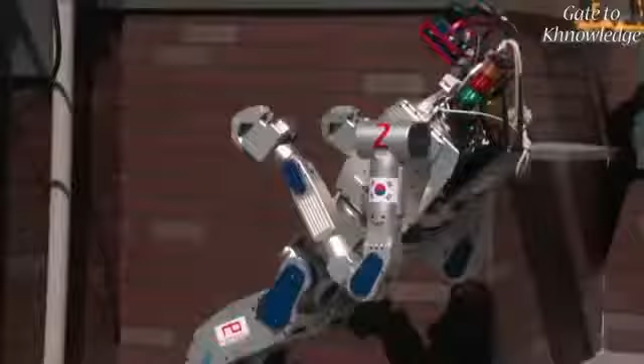It's one of the most ambitious challenges in the history of technology. Ladies and gentlemen, start your robots. The race to build robots that can save lives in a disaster, that can even rescue us. But to do that, they'll need to climb ladders, walk over rubble, turn valves.

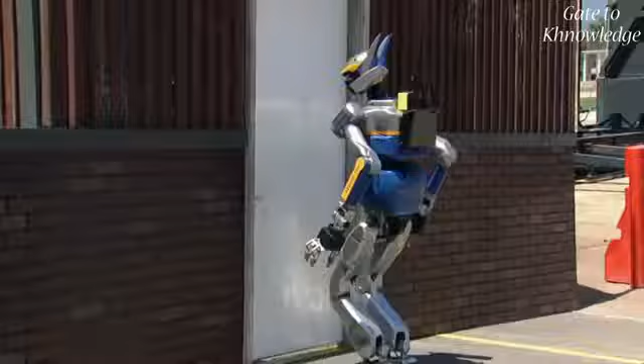And no one knows if it's even possible. There's so many things that could go wrong. It's scary. When you try to instill human-like intelligence, human-like manipulation skills into machines, it's just very, very hard to do. What will it take for robots to have the right stuff?

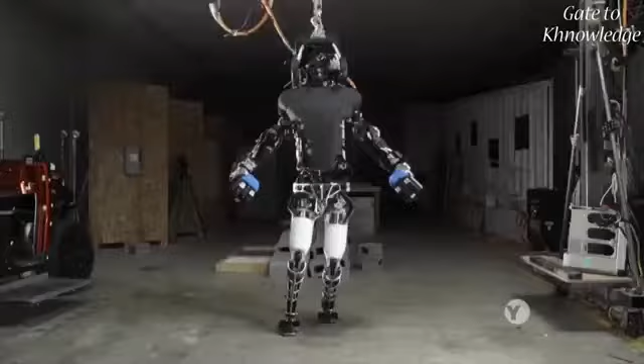And are we ready for the consequences? It's too easy to look at them and say, oh, they're not there yet. They will get to something very powerful. And then you have to say, well, where will we have gotten to? They might actually have the capacity to be smarter than us.

What impact will robots have on our future? On how we work, how we interact, even how we see ourselves.

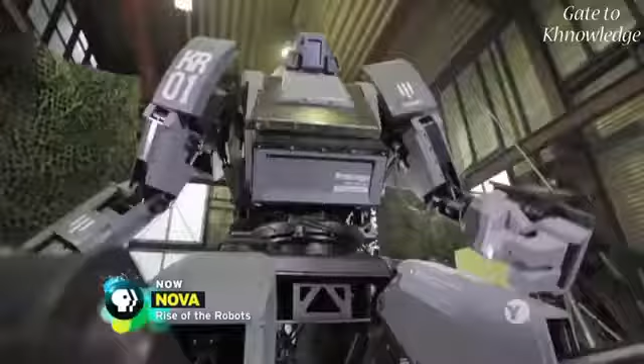Some look so human, it's hard to tell us apart. But looks can be deceiving. People see these humanoid robots developed in Japan and all these fancy things, and they had the expectation that, oh, we have these robots and they're gonna save the world. But that didn't happen.

March 2011. A devastating earthquake and tsunami rocked Japan. Explosions and fires at the Fukushima Daiichi nuclear power plant left the area dangerously radioactive. Going inside, even for a few minutes, was life-threatening.

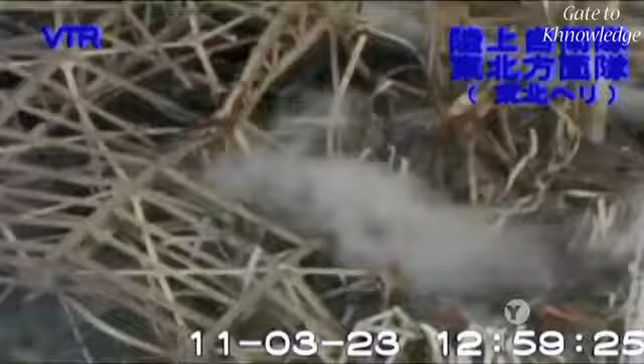It was the perfect time for Japan's cutting-edge robots to come to the rescue. But none did. The real tragedy was if simply some valves could have been turned, or some switches could have been flicked, or hoses attached, a lot of the meltdown could have been prevented.

The question was, when robots were needed the most, just how come they weren't effective? And so I think that led to a lot of reflection. After decades of research, where were our robot heroes?

For generations, science fiction has portrayed robots as our loyal servants. Welcome to Altair 4, gentlemen. I am to transport you to the residence.

But it turns out, our imagination has taken us much further than our technology. It's hard to create robots that can function in our world. One of the challenges with deploying robots in the real world is that the real world is like the wild, wild west. It's very rich and complex and very unforgiving.

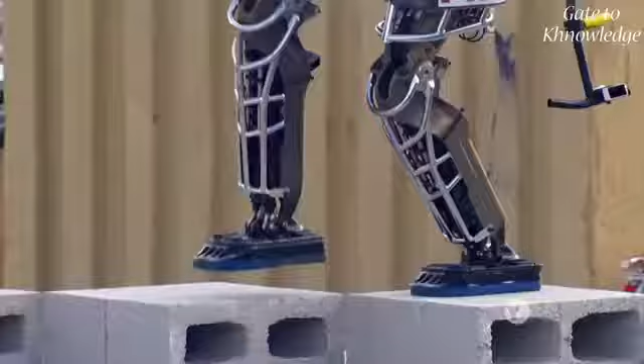What will it take for robots to make their way out of the lab and into the real world? We're about to find out. Ladies and gentlemen, start your robots. At the most ambitious robotics competition in history.

We welcome you to the DARPA Robotics Challenge. This is where imagination meets innovation. You have completed the course! In 2013, at a racetrack on the outskirts of Miami, DARPA, the research arm of the U.S. Department of Defense,

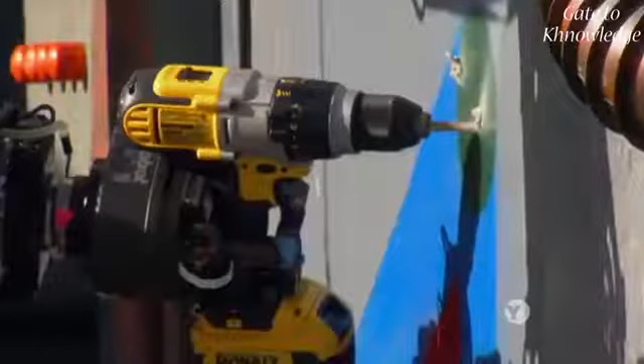challenged 16 teams from around the world to build rescue robots that can help save lives in a disaster. Very exciting, very exhausted, very nervous, and frustrated at the same time. Dealing with robots is always like that.

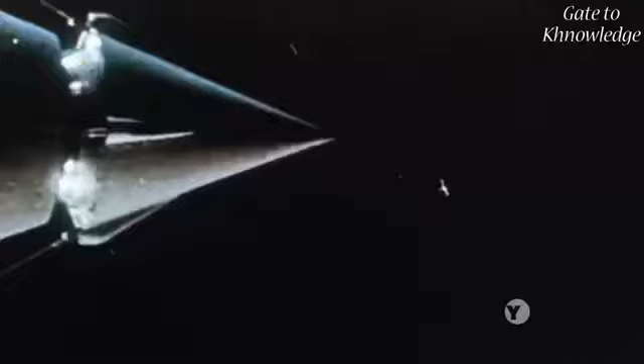It's the kind of challenge DARPA is known for. Cutting edge and high risk. DARPA was formed back in the 1950s in response to the launch of Sputnik, the world's first artificial satellite built by the Soviet Union.

Since then, the agency has spent billions developing military technology, advanced weaponry, like stealth technology, drones, and night vision. But the spin-offs from this research have gone far beyond the military. The internet, GPS, bionic arms, even Siri were all fueled with DARPA funding.

Cancel golf today. It's off your calendar. Good.

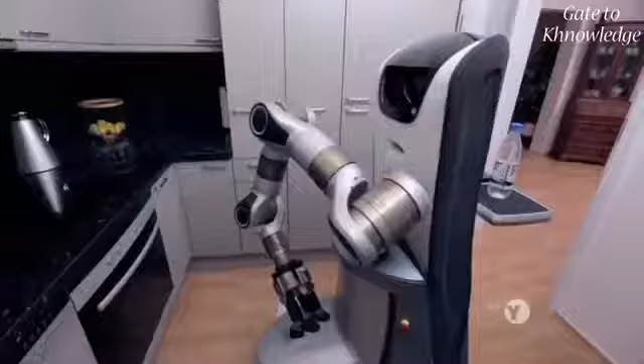If these researchers succeed in creating rescue robots, the same technology could be used to develop robots that take care of the elderly, babysit our kids, clean up after us. Robots in almost every facet of life.

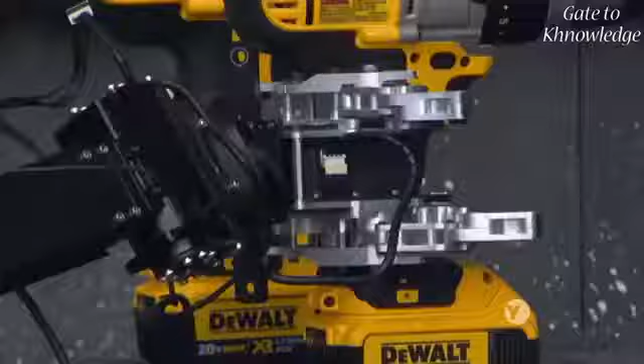But first, can robots really help out in a disaster? To find out, DARPA has set up an obstacle course for bots, with human operators controlling their every move. Yeah, here we go. The robots must perform basic tasks like opening a door. All right, go, go, go.

Turning a valve. Drilling a hole in a wall. Walking over rubble. Even driving a car. Bot after bot takes their first steps into the real world.

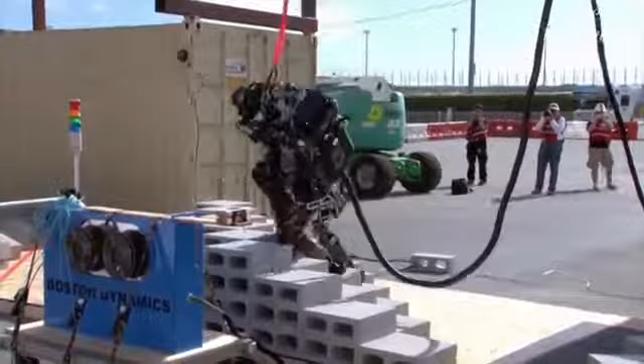And there's nothing easy about it. It's a monumental challenge. DARPA calls it DARPA hard. I almost said it was DARPA impossible.

Robots fall off ladders. Some barely move an inch. They even struggle to open doors. The things that a human can do instinctively, easily—you don't realize how hard something like walking is until you try to reproduce it in a machine.

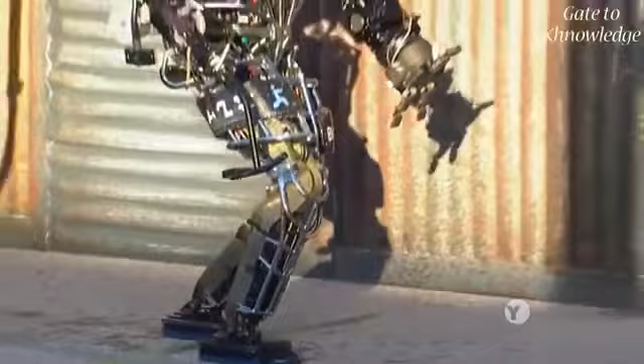When my baby daughter took her first step, did she walk? No, she took a step and she fell down, right? Over time, she started to walk, right? And it's kind of like we're seeing here. There are a lot of baby steps.

After 2 days of competition, the results are not impressive. But this is just the start of DARPA's grand experiment. The agency is giving the roboticists another chance to get it right, and they're putting their money where their mouth is. The top scoring teams in this first challenge are receiving $1 million each to continue their work.

In 18 months, they'll return for the final challenge and the chance to win a grand prize of $2 million.

It's not clear to me how well the teams are going to do. They can't be too hard, because then everybody fails. Can't be too easy, because then it's not worth doing at all. But if you make it just right, like Goldilocks, right? I have tried to hit the sweet spot of difficulty, but I think risking failure is the DARPA way.

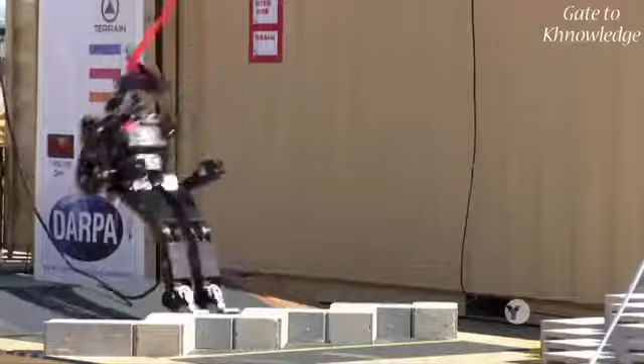Will the challenge push the technology a giant step forward? Will robots ever make their way through our world the way we do? No.

Back in the early 50s, Alan Turing, one of the founders of artificial intelligence, said that the best thing we could do was build a robot with TV cameras for its eyes and motors to drive its legs and have it romp around the countryside and learn from the real world. But he decided that was technologically too hard back in the 50s, which it certainly was. So he said, let's leave that physical interaction to later, and let's work on more abstract problems, the intelligence abstract problems.

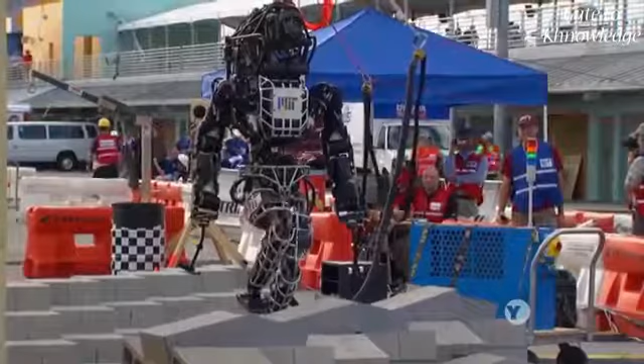The field of artificial intelligence, or AI, has already built machines that beat us at chess, trade stocks with lightning speed, and search for anything we want in an instant. Yet, when it comes to robotics, progress has been painfully slow. Some of the biggest problems robots face are things we humans usually take for granted, like mobility, manual dexterity, and the ability to see and understand our environment.

These are the challenges the robotics teams will tackle in the DARPA competition, beginning with mobility. What's the best way to make a machine that can move through our world? Does it need to walk on 2 feet like us?

Some roboticists think the answer is yes. The shape of the robot is dictated by what it needs to do. There's a reason why the step size in your home is this big. There's a reason why your door handle is this high, because it's designed for humans to move around. So unless the robot is the shape and size of a human, it won't be able to navigate and move around in the environment designed for humans.

But getting around on 2 feet isn't easy, even for us. It takes your average infant almost a year to go from crawling, to toddling, to walking. What does it take to give a robot this intrinsic human ability? It's one of the biggest problems facing roboticists today.

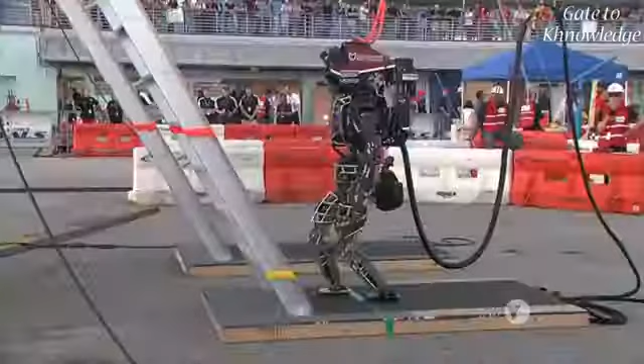In Pensacola, Florida, at the Institute for Human-Machine Cognition, or IHMC, one of the teams competing in the DARPA Robotics Challenge is hard at work developing its own software to run this massive bot named Atlas, a 385-pound powerhouse. DARPA funded the design and development of this rescue robot. Several teams competing in the challenge are using this hardware, but writing unique software to guide their robot.

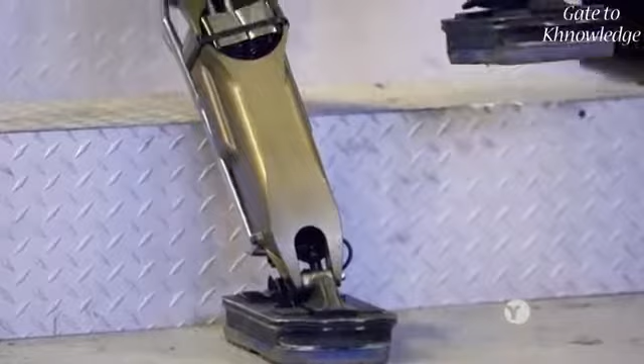You might wonder why Atlas is so top-heavy. Most of its oversized head is packed with cameras and sensors, and while its feet may look small, they're designed to fit in the kind of places we walk. With bipedal walking robots, there's still a lot of strategies we have to determine, and there's no known textbook solution yet. It's more art than science still.

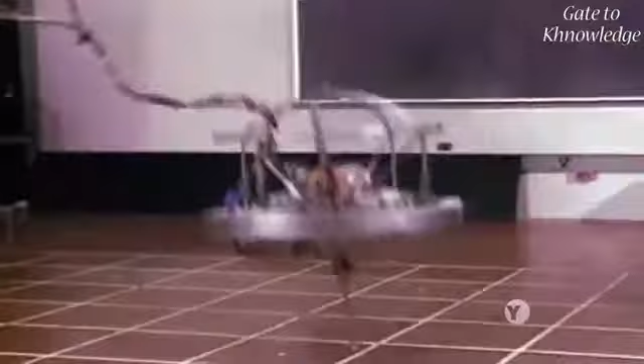For team leader Jerry Pratt, finding the best way for a bipedal robot to walk has not been easy or quick. Well, I've been working on bipedal walking robots since 1994, so 21 years now. He started back in graduate school at the MIT Leg Lab, where some of the most bizarre-looking bots hopped, jumped, and flipped. But the robots Jerry built were different, because they walked on 2 feet.

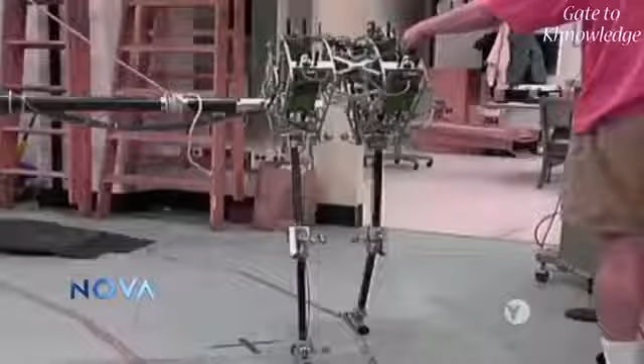Using nature as his guide, Jerry gave his bipeds hips, knees, and ankles that mimicked how animals move. This one, called Spring Flamingo, had specially designed motors that worked a lot like muscles, varying the amount of power each joint used. Its legs and feet worked a bit like shock absorbers. They had a little give.

That robot was a really good workhorse. We've had it working for about 3 years, probably walked about 20 miles or so.

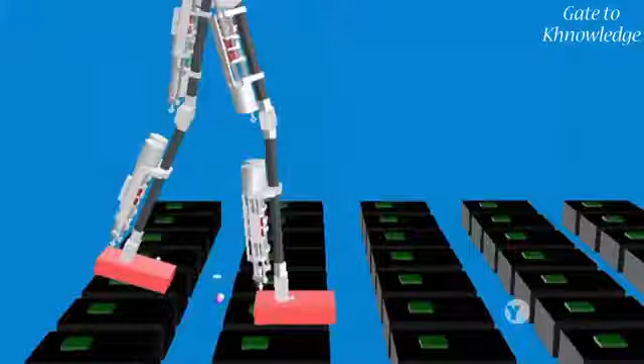When it came to designing a humanoid, he focused on developing the perfect combination of hardware and software that would enable his biped to stay upright as it calculates the best way to shift its center of mass, lift its leg, swing it forward, and put its foot back down in the right place, and with just the right amount of pressure. To make these elaborate calculations, the robot needs instructions, lines of code that tell it how to move.

These lines of code are written in a programming language that resembles English. But for Atlas to use them, its onboard computer has a program that translates them into a language a machine can understand: zeros and ones. It takes more than 2 million lines of code to run Atlas.

500,000 just to put one foot in front of the other. It's the interplay of hardware and software that keeps this bot on its feet, an ability that took hundreds of thousands of years of human evolution to perfect.

We'll often look at what strategies does a human use in order to walk, because the physics in the world that a human operates in is the same as the robot. But we wouldn't be able to take a single step without having some pretty amazing senses.

When you walk, your eyes detect the position of your body relative to the world around it. At the very same time, a series of fluid-filled canals in the inner ear tells your brain the position and motion of your head, so you know which way is up.

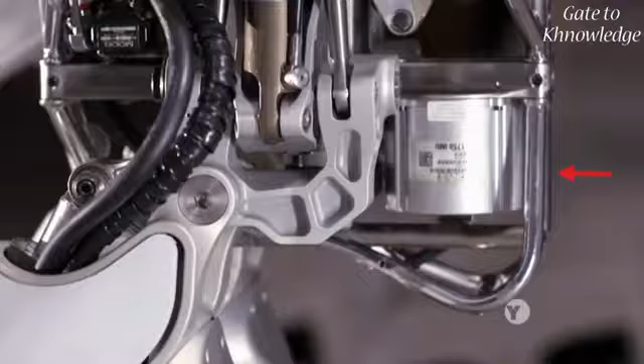Instead, it uses a small cylinder in its butt that contains gyros and accelerometers that tell it where it is and how it's moving. In addition, sensors on each joint tell Atlas where its limbs are in relation to each other.

The result is an extraordinary sense of balance, allowing Atlas to stand on 1 foot like a ballerina, at least in the lab.

But in the real world, Atlas's gyros and sensors aren't always enough. We only have a limited number of sensors on the robot, whereas with a human or an animal, you have thousands of little force sensors on every square inch of your body, over 100,000 just on the soles of your feet.

You can step on something and detect what it is, whereas the robots, they don't know that. They just know they stepped on something.

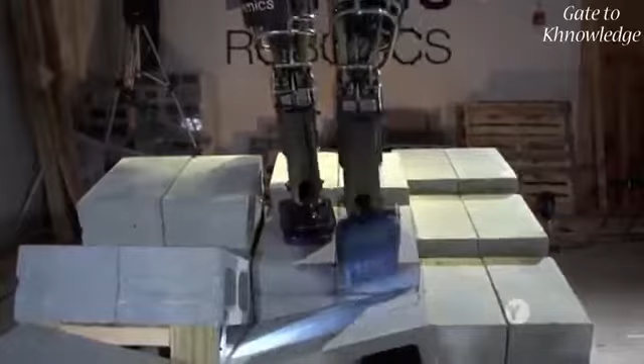At the final challenge, if Atlas should step on something the wrong way, if the hardware and software don't work perfectly, it will fall.

We cannot get up from a fall currently, and we probably won't survive a fall. If we fall during the finals, that may be the end of our whole weekend.

Atlas isn't the only biped that has trouble staying upright. Meet Hubo, designed and programmed by cousins Paul Oh and Jun-Ho Oh.

At the first challenge, Hubo clearly wasn't ready for the big, bad world. It's with fondness, it's also with some pain that we think about it. We went into the challenge with quite a lot of enthusiasm, but when we got there, really, it was just like one thing after another.

There were a lot of these real-world instances that we did not experience in the lab. That was a real awakening.

Across the ocean, at the Korea Advanced Institute of Science and Technology, Jun-Ho Oh is also doing some soul-searching. Our expectation was very high, but the result was very catastrophic. So the gap was too big.

It took at least a couple of months for the recovery. Then I got back to my normal mental stage.

After the shock wore off, the Koreans agreed to make a radical change in the design of their biped. My cousin has come up with this idea of adding wheels to Hubo's knees, as well as casters on its toes. And I call it the kneeling prayer mode.

Others like to call it wheeled mode or transformer bot mode.

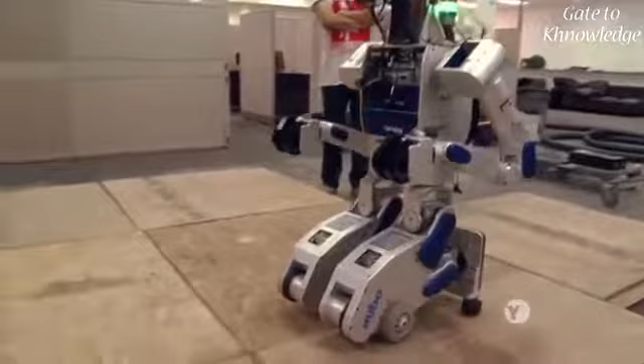Okay, so we are so happy. So we decided: short distance movement, just walk. And far distance, we move on wheels. It's much more stable.

Humans don't have wheels on the knees, but there's no reason why we can't add that to a robot. When the Koreans return for the final challenge, they'll debut their humanoid transformed with the help of some clever engineering.

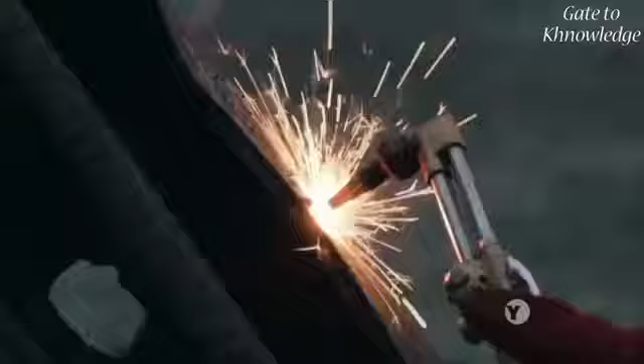But for a robot to help out in a disaster, getting there is just the first of many challenges. To assist rescue workers in the real world, it needs hands, with the kind of strength and dexterity it takes to lift heavy hoses, drill into walls, solder, and saw. It needs a pair of these.

Our experience of the human hand is that we can do everything with it. We can dig ourselves through rubble, we can make really nice paintings, we can knit. The human hand really distinguishes our species from all other species.

If you look at the way humans manipulate objects, we have this instinct for tactile sensing, for feeling the world. Understandably so, we've had over 200,000 years of human evolution to get to this particular point. Is it possible to translate a masterpiece of evolution into motors, cables, sensors, and thousands of lines of code?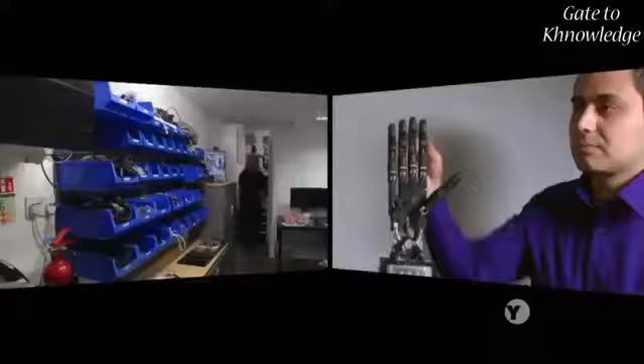On the outskirts of London, behind an unassuming storefront, a small group of robot enthusiasts are building a robotic hand that they hope could one day rival our own. When we first started building a hand, we actually bought anatomy books and tried to understand how the hand works. We thought it'd be good if we could copy, as best we can, the human hand.

The shadow hand was built with the idea of trying to get as close as possible to the human hand, but as engineers. Like the human hand, this robotic version has 4 fingers and a thumb. It's about the same size as the original, and can even shake like one. But that's where the similarities end.

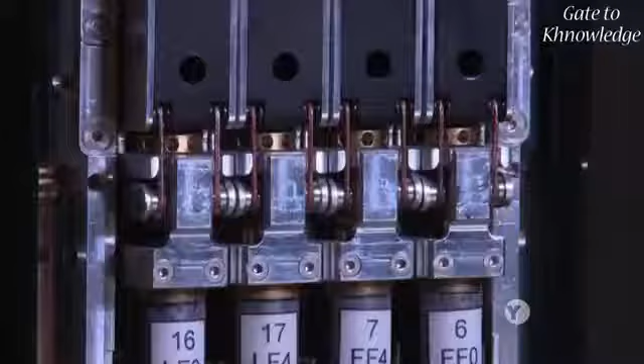We pack a huge amount of sensing and actuation. We have 25 joint position sensors, 9 analog to digital converters. We have 2 tendons coming from each joint to a motor in the forearm, 20 motors in the forearm. Each motor has a temperature sensor, a current sensor, and 2 force sensors, so we can tell how hard the motor is working and how hard it's driving the tendons. We put contact sensing in the fingertips so we can tell that we've touched something. So there's a wealth of computing power just to get something that has the same set of movements as your hand.

And with this level of dexterity, it can do a lot more than card tricks. We had this hand handling pipettes and lab equipment, removing the human from the risk - for example, people that work with very, very nasty bacteria and viruses.

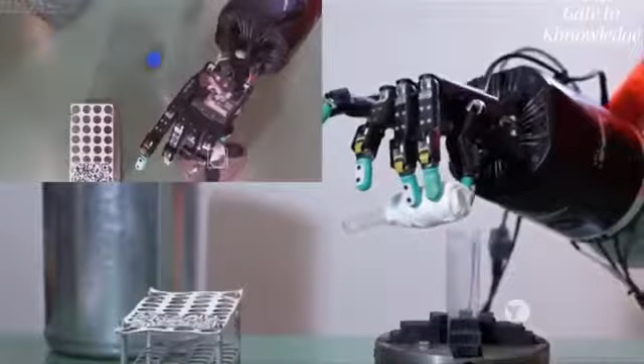The shadow hand was designed for delicate tasks, not for dirty jobs like this. When you look at where robot hands get used, you find people who want to do something delicate and precise, and people who want something big and rugged and solid. For the robots in the DARPA challenge, strength and precision are a must.

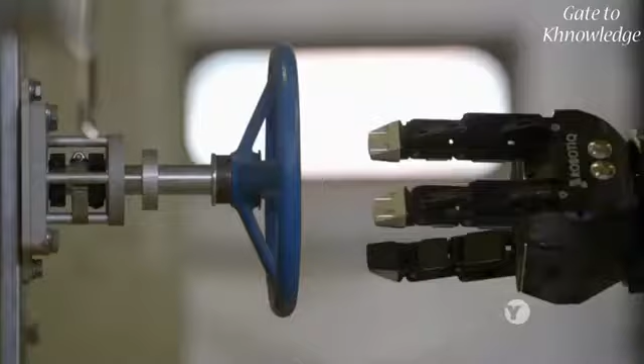Finding the balance between them has been a struggle for team leader Brett Kennedy, who developed this 4-legged rescue robot named RoboSimian here at NASA's Jet Propulsion Laboratory.

My first intuition is that this needed to be a very robust hand, and I'm thinking, well, robust means big. Why don't you go find out how big Wilt Chamberlain's hand is and make a hand that big? So, if anybody's curious, Wilt Chamberlain's hand is very, very big. And not only is it very, very big, when you make a robotic version of it, it actually cannot deal with normal human scale tools.

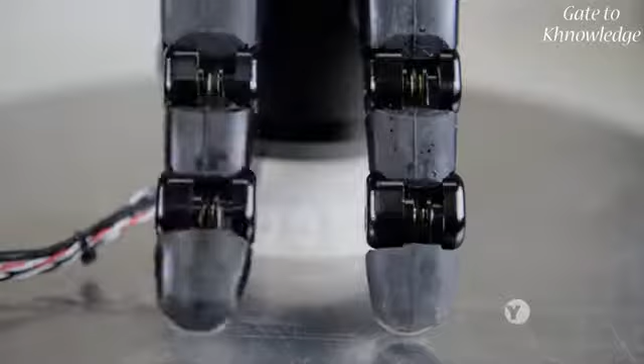So they modify their design, making a smaller hand with just 3 fingers. This does everything we needed it to in the competition. It grabbed everything, the human tools, so we thought we were in pretty good shape. But then, at the first challenge, RoboSimian had to open a door, and things got messy.

So here's an individual finger, and in that individual finger there is an artificial tendon, a synthetic fiber. When excessive forces happen, it snaps.

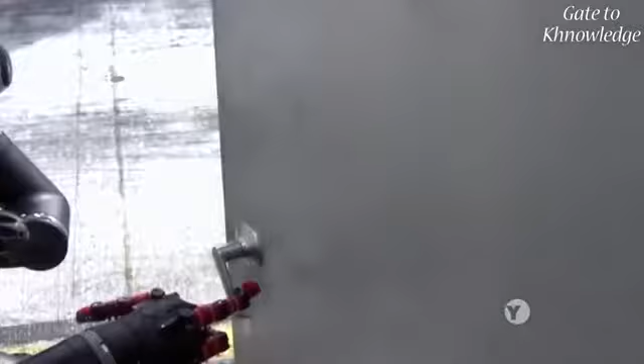When Kennedy realized RoboSimian's fingers couldn't provide the strength he was looking for, he came up with a radically different idea. So this is the cam hand. To do most of the work that we need to, a simple hook works just fine so that we can actually get a grasp and we can hold on to most everything we have to.

Fact of the matter is this is a very simple, dumb system. It closes until it encounters something, and then that will hold it, and hold it securely.

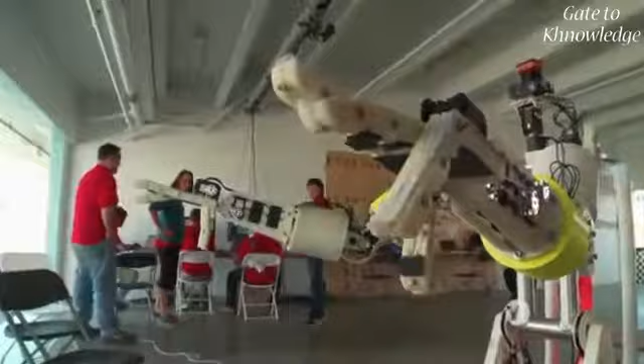In their quest to grasp victory, the teams competing in the DARPA Challenge will rely on all kinds of hands.

Many are using this gripper, designed with 3 fingers that can wrap around a variety of objects and even pick up something small. If we look at tasks like opening a door or using a drill, using hand tools and things, pretty much all these tasks you can perform using 3 fingers.

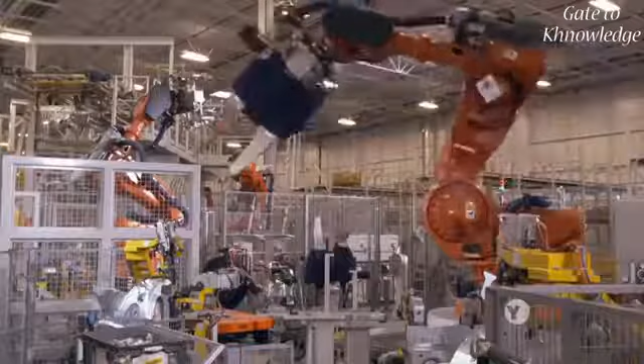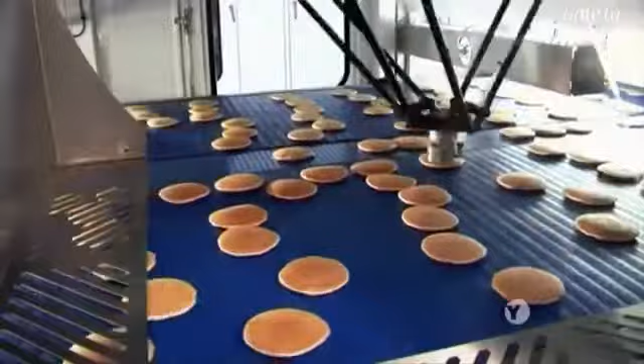Robotic grippers have already made their way onto the factory floor, attached to massive robotic arms that are as robust as they are precise. They build cars, lift heavy boxes, pack beer, sort through anything and everything from batteries to pancakes, doing the kind of jobs many people consider repetitive and downright boring.

But some experts fear as robots move beyond the factory into the real world, they'll take on a lot more. I think that we will lose at least 20 or 30% of our jobs over the next 20 years, and probably more.

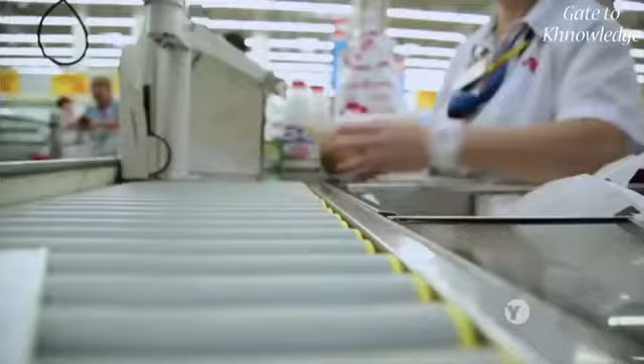Fast food workers are mostly going to be replaced. And the cashiers at Walmart, their jobs aren't going to last that much longer. The first to go are going to be drivers. Uber is spending a lot of money on driverless cars. Google is spending a lot of money. Now Toyota is. 40 years from now, there are not going to be a lot of jobs.

But not everyone agrees the future looks quite so grim. Over the past century, while robots and automation took over many manufacturing jobs, other kinds of jobs have increased. Some think that trend will continue. Machines in all of modern economic history have helped create jobs, not taken them away.

Machines are complements to workers, not substitutes. They come together and enhance the productivity of each. They need each other.

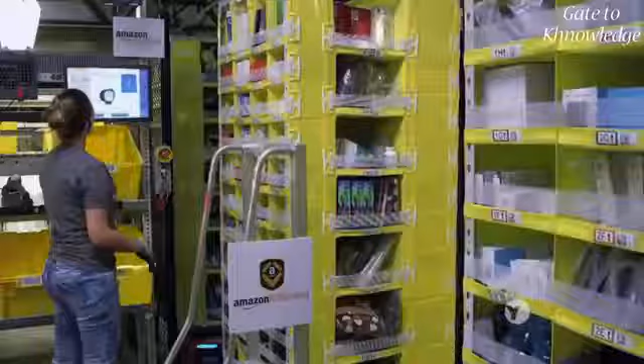Today, more and more jobs require humans to work side by side with robots, on the assembly line, programming them, and repairing them.

Technology creates new jobs. But only for those who have the skills to adapt.

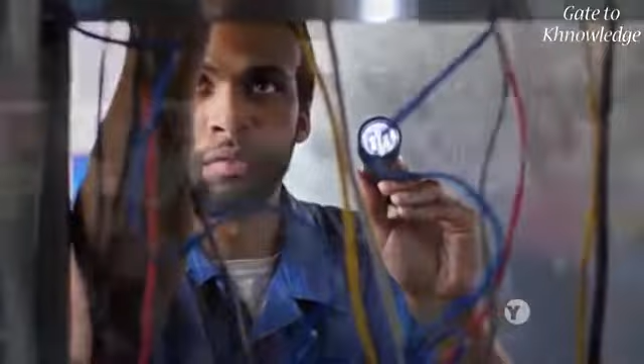What happens to the workers left behind? The worker who was displaced has to be compensated through retraining or through a pension. So that's a social problem, not a problem rooted in technology.

People should already be thinking about what kind of society we would want if not everybody can have jobs. Many ethicists say we should also be thinking about which jobs we want to hand over to machines.

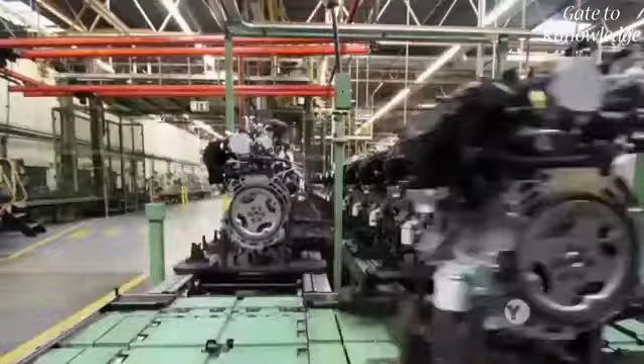Much of the things that we are creating can be used for a whole broad range of potential applications, ranging from elder care and child care robots to healthcare robotic platforms, even surrogate sex objects. What is acceptable? What impact these high-tech machines will have in the workplace and our homes remains unclear.

But one thing's for sure: robots are starting to take their first baby steps out of the lab and into the real world, learning how to manipulate objects we use every day.

But for a rescue robot to be truly useful, there's another hurdle researchers face, the toughest one of all: the challenge of giving a machine the ability to understand its environment, to give it a brain.

Our robot doesn't really have what you'd call a brain. He's not seeing the world, he's not perceiving the world. It's not thinking, it's not reasoning. You know, it's pretty dumb.

In fact, today's rescue robots are so dumb, DARPA permits human operators to guide them step by step. The bot waits for instructions that tell it what to do, those zeros and ones that computers understand.

The instructions travel through an elaborate pipeline that connects every piece of hardware, every motor and sensor, to a computer controlled by a team of human operators. The operators communicate with their robots via a wireless connection, just like they would at a real disaster. And at the final challenge...

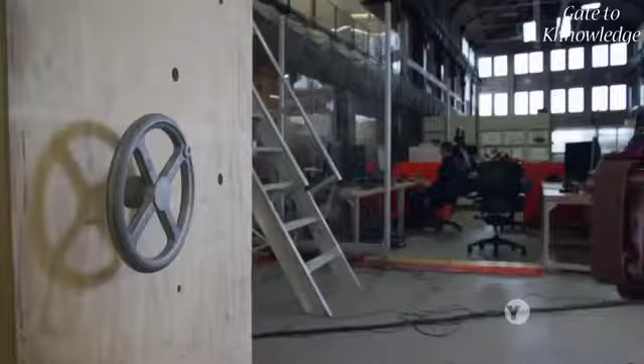These operators at Carnegie Mellon University are about to guide their rescue robot, named Chimp, through one of the skills it needs to master for the final DARPA challenge: turning a valve.

Using 6 different cameras located on the front and back of its head, and a spinning sensor called LiDAR, the bot sends data about its environment to the operators. A 3D image of Chimp's world appears on their monitors.

Chimp has no idea what it's looking at. So with the click of a mouse, the humans tell it exactly where the valve is. Things like recognizing objects, that's a very hard problem in robotics.

So we let the human tell the difference between a cat and a dog, a valve and a door. Turn the valve. Next, they show Chimp where to grab the valve, which way and how far to turn it. But it would be impossibly slow and impractical for the operators to tell Chimp how to move every joint, every sensor, every motor of its complex arm. This job must be done by the robot, all on its own.

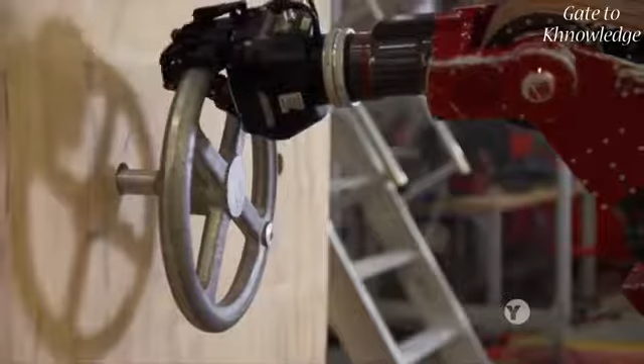As we move towards developing this technology further, we really want to push on the robot autonomy and let Chimp do more things on its own. But we always want to keep this as a tool for a human. In other words, keep the human in the loop and in control.

But that's not every team's goal.

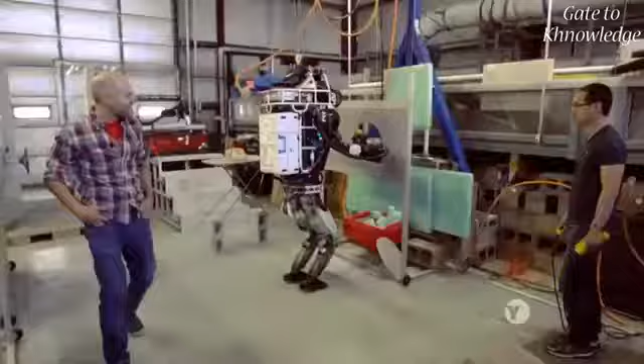At the Massachusetts Institute of Technology, Russ Tedrake is taking a different approach. He's determined to give his Atlas robot as much autonomy as he can, to make it a whole lot smarter. Our goal as researchers, especially in this artificial intelligence lab, we want to solve the long-term research questions about how to make autonomous robots. This is the closest we've ever come to building an artificial intelligence machine where this humanoid robot is moving through the world solving real problems.

At a disaster where you can't always count on a wireless connection, the smarter the bot gets, the more it can do on its own.

To create a more autonomous robot, Tedrake is developing software that helps it find and identify objects with a bit more independence. So if the robot is just looking at my kitchen at home, there's dishes everywhere, and you ask the robot to find a spoon, that's a really hard question. If the human just says, there's a spoon roughly over here, click, and he just has to look in a little patch of space for something that's roughly the same shape as a spoon. That takes an extremely hard problem of object recognition in a complicated environment and turns it into a very simple problem of, okay, I want to look for spoon-shaped things in this small region of space.

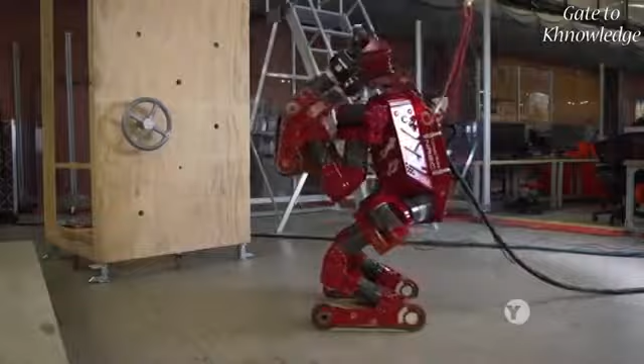While CHIMP needs its human operators to tell it exactly where a valve is and where to grab it, MIT's Atlas is programmed to recognize a valve on its own, figure out the steps it needs to take as it approaches, then grab and turn it with very little human help.

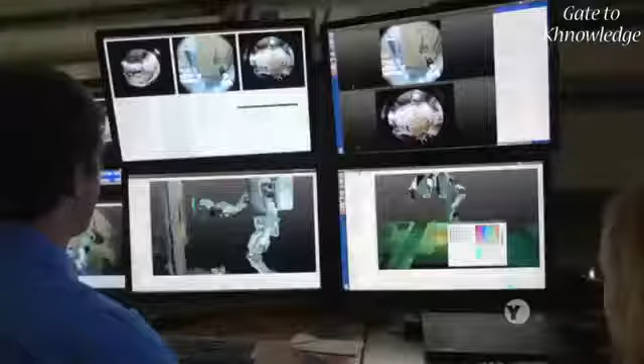We can put it in an autonomous mode and basically just watch the robot execute. It shows us what it's about to do. We could always stop it if it looked like it was going to do something wrong. But when things are going well, the robot's operating almost completely autonomously. So there's no real input coming from us to the robot at this point. It's just going on with its task.

A more self-sufficient robot could potentially help save more lives in a disaster. But just how independent do we want rescue robots to get? What if an autonomous robot enters a disaster and has to decide who lives and who dies?

It's the kind of moral dilemma that gave Will Smith nightmares in the movie I, Robot. You are in danger. When a bot chose to save his life over the life of an 11-year-old girl. Save the girl! I was the logical choice. Calculated that I had a 45% chance of survival. Sarah only had an 11% chance. 11% is more than enough. A human being would have known that.

While today's cutting-edge machines, like the thousands of drones used by the US military, still have a human in the loop, what happens in the future if they don't? There's conversations going on right now, conversations about what are the ethical laws of robots? How far should we really push this technology? How much autonomy do we want to give this new technology?

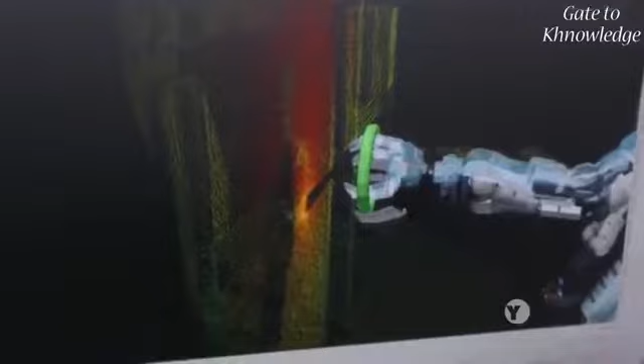There's so many things that could go wrong. The chance that the robot could break, or something that worked 99 out of 100 times, but we get unlucky. It's scary.

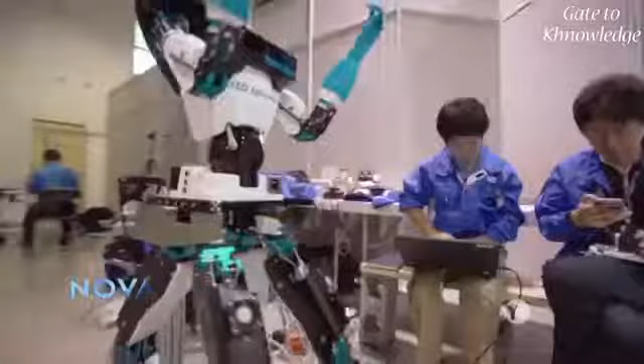June 5th, 2015. Our roboticists meet once again, this time at the Los Angeles County Fairgrounds. Over the next 2 days, they'll face off with finalists from around the world. Several teams come from Korea and Japan. This little robot comes from Germany. Most are funded through government or corporate sponsorship, but some bots, like this odd-looking one called Cogburn, are funded by the teams themselves.

We want to be first place in this competition. You too? Yeah, of course. It's a very stiff competition. Looks like there are a lot of good teams. Probably a lot that make it all the way through the course. So it comes down to top speed.

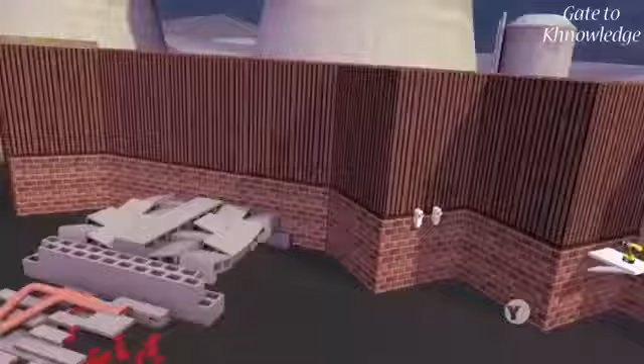To win, each robot must perform a series of tasks, a lot like the ones they faced in the first challenge: from driving a car, to drilling a hole in a wall, to walking over debris, to tackling a flight of stairs. The robot that completes the course in the shortest time wins. That puts a lot of pressure on the operators to keep their bots moving.

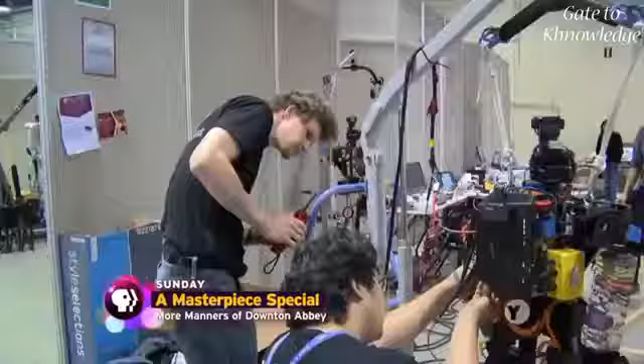And DARPA has thrown another wrench into the mix. Just like at a real disaster, the power of the wireless connection between the operators and their robots fluctuates. Sometimes the robots will receive a degraded signal, just bits and pieces of the data that tells them what to do. Other times, no data, no instructions at all. DARPA is hoping this will push the roboticists to develop more autonomous systems, bots that can finish a job without our help.

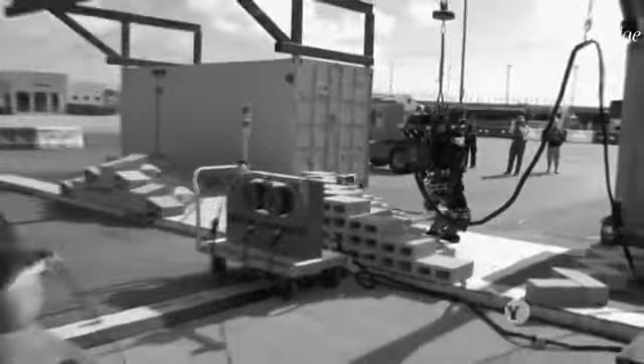But what makes the final challenge downright nerve-wracking is that unlike the first competition, where the bots were tethered, this time around there are no safety lines allowed, putting these multi-million-dollar machines in real jeopardy. What I was worried about is that almost none of the teams had tested their robots off the safety tether. We had no idea when these robots fell how badly they would break, so many of the teams were really scared.

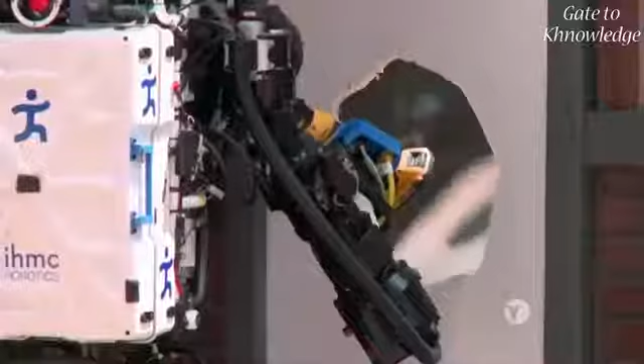Finally, the competition begins. Each robot has 2 chances to run the course. IHMC starts their first run. The robot drives without a hitch, walks up to the door with ease. All right, going through the door. All is looking good. Just 2 more tasks to go. Nice.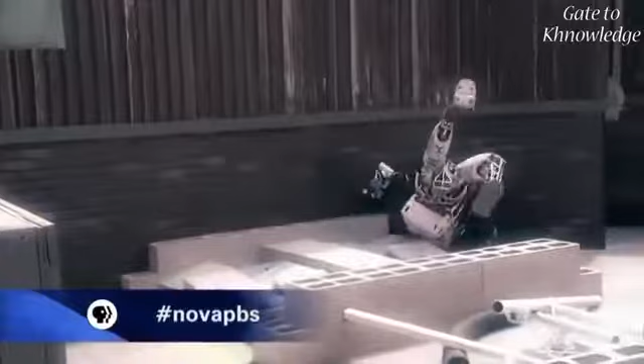It's Jerry's worst nightmare. After years of perfecting his walking software, a tiny misstep in the real world brought one of the most advanced robots on Earth to its knees. Nobody was really sure if the Atlas robot would survive a fall. We've never had Atlas fall before today.

The team worries the bot can't be repaired in time for its final run. For Carnegie Mellon's robot, Chimp, the day is also filled with ups and downs. When he fell down through the door, he's laying there and we're just, oh no.

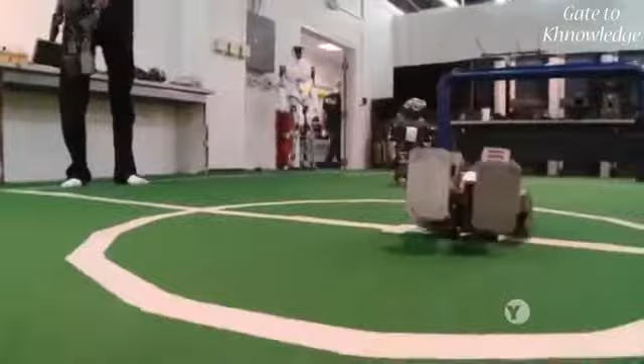Back in the garage, the operators scramble to find a way to get the red bot back up on its treads again. But the bigger a bot, the harder it falls. Smaller robots fall without breaking and have truly bizarre ways of getting back up again. But they're too small to do the kind of heavy lifting rescue robots need to do at a disaster.

Once you make it heavier and larger, you need stronger motors, and stronger motors mean heavier motors, and heavier motors increase the overall weight. Chimp weighs over 400 pounds. That's an awful lot of robot to lift.

The crowd begins to wonder if its run is done. I found it fascinating to watch the crowd watching the robots. This was really an emotional moment. They're collections of wires and gears and motors, and we were sympathizing with them at a very basic level.

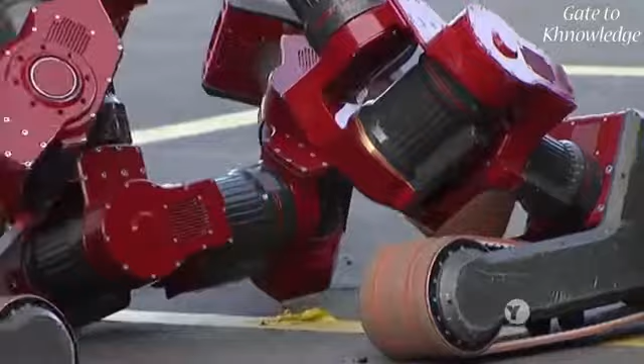Then Chimp's leg begins to move. And this little kid down in the front screams, 'He's getting up!' The bot not only gets up, it completes all 8 tasks, becoming the first robot to finish the course.

But not every team is so lucky. As MIT starts its run, hoping to show off its robot's autonomy, things run amok in the control room.

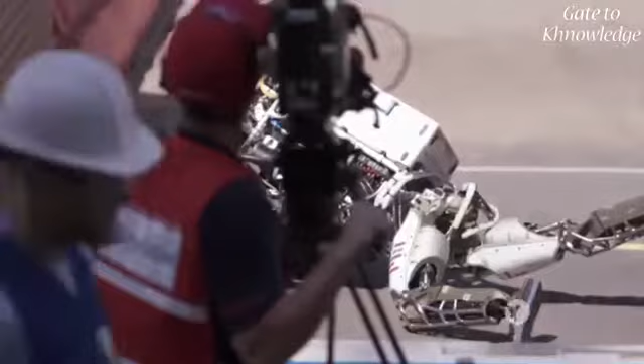We made a simple operator error when we went to get out of the car. We forgot to turn off the driving controller, so the foot tried to push the throttle when it was getting out of the car. In an effort to drive and get out of the car at the same time, the robot keels over and breaks its right arm.

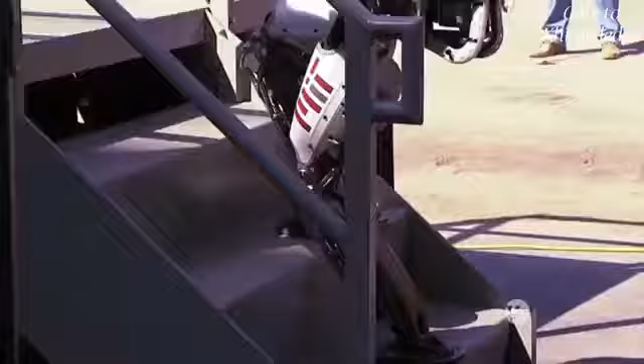But the operators were able to recover and do basically the entire course left-handed. The robot is still able to do most of the tasks, but it faces one insurmountable problem. The team has programmed it to use 2 hands to pick up the drill and turn it on. It can't do that when one of its hands is broken. Without completing all the tasks, Team MIT has no chance of winning.

A weary Team IHMC has worked through the night trying to fix its robot. Somehow the robot's still working, but the fall we took did something with the robot where he's kind of all messed up a little bit.

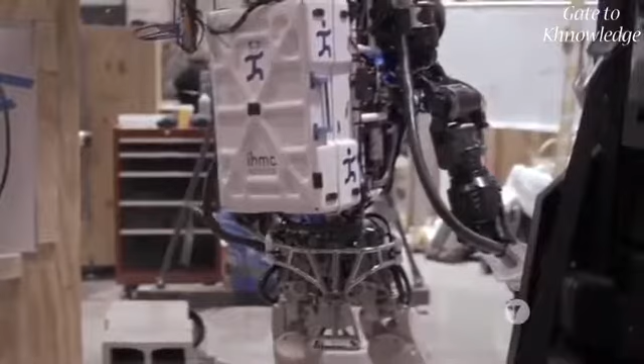There's something wrong with its LiDAR, the system that scans the robot's environment. The operator's going to have to adjust on the fly and compensate in his head for the errors in our sensors. Are we really leaning that much? Our strategy is still what it was yesterday, 8 points or bust.

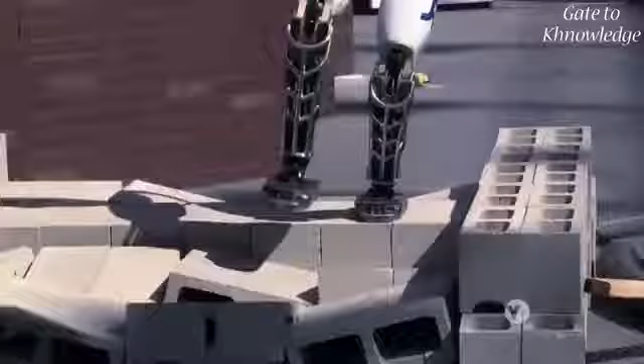The time has come for their final run. They make it through all the tasks and approach the dreaded debris, where they fell on their first run. All right, you gotta swing the right first. But this time they succeed.

The operator guides their robot all the way up the stairs, finishing the course in record time.

Having a human in the loop, you've got a supercomputer up here. Humans can adapt to just about anything. 8 points confirmed. The team is now in the running for first place.

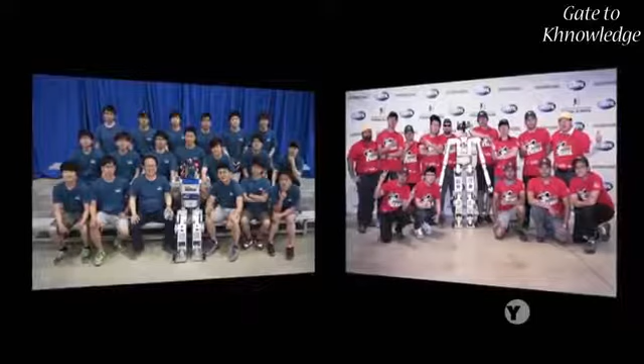But a one-of-a-kind bot could still give them a serious run for their money. Cousins Paul and Jun-Ho are each competing with their own robot, doubling the chances that one of their humanoids on wheels will win the day.

Paul's team makes it as far as the drilling task, until the drill gets stuck, overheats, and shuts down. But cousin Jun-Ho's team moves on. Their robot completes all the manual tasks by rolling on its knees or standing on its feet.

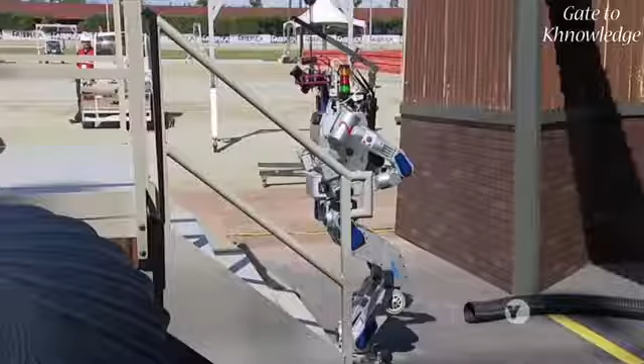But when it approaches its final task, the stairs, it suddenly stops. Back in the garage, its human handlers are double and triple checking the instructions they're about to send their robot. A mistake here will cost them the competition.

You have to understand that when the robot is staying still, the operating room is very, very busy. If the robot is moving, they don't do anything. Their job is done. All they can do now is watch and wait.

Finally, Hubo starts to climb the stairs, unlike any human on Earth, with its head facing forward and its feet facing back. The humanoid on wheels finishes all 8 tasks faster than any other robot.

Jun-Ho Oh's robot Hubo wins the day. IHMC comes in second. Team Chimp from Carnegie Mellon comes in third.

These bots may have moved slowly, but just like a toddler, they're taking baby steps into our world.

We tend to think the world today is what it's going to be like in 10 years and 20 years. But if we look back 10 years at what we had, look back 20 years at what we had, the world has been totally transformed. It's really hard for us to imagine how different it's going to be. In some ways, the change in the field has been very incremental, but in other ways, it's been completely unpredictable.

It's too easy to look at them and say, oh, they're not there yet. Well, they will get to something very powerful. And then you have to say, well, where will we have gotten to?

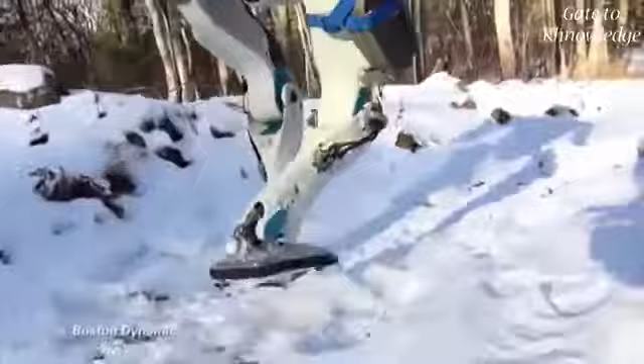In fact, a few months after the finals, Boston Dynamics, the makers of the Atlas robot, took this updated version for a stroll in a snow-covered woods. While it stumbles, it quickly recovers its balance, just as we would.

You know, I think we just need to approach this with our eyes open and understand our vulnerability to a technology that we are on the cusp of creating.

There's no question that developing rescue robots with the potential to save lives makes a lot of sense. But the potential for other applications remains unclear.

The time is now to think about their role in our lives as we face the rise of the robots.